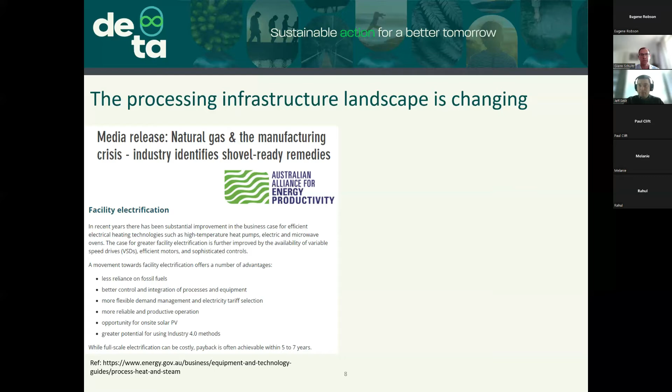As we discussed in the last webinar, there's still a lot of work that needs to be done around the commercialization of hydrogen, certainly when we get down into industry levels.

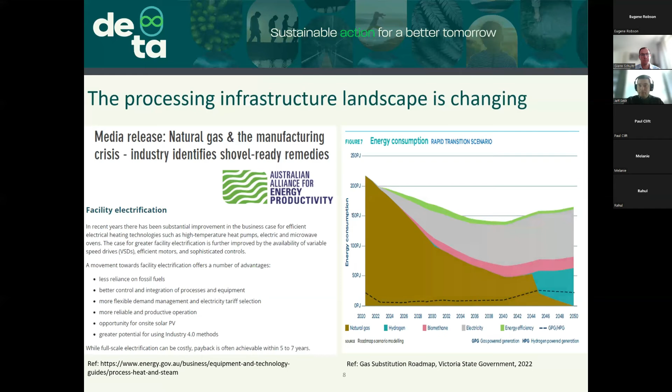Just to lead on to that, I think it's time to address the old elephant in the room, which is the carbon tax. So the question really becomes: how long is Australia going to remain exempt from a carbon tax or some sort of ETS program?

I'm not going to say this is obviously coming, or when it's coming. This really comes down to individual businesses looking at their risk appetite moving forward for a potential carbon tax and what that's going to mean for their facilities.

If we look across the ditch to New Zealand, they're currently paying $87.15 per tonne as a carbon tax, with the Climate Change Commission suggesting they should raise the trigger pricing, once achieved over and above the credit allocations within that $87 network, to about $171 a tonne.

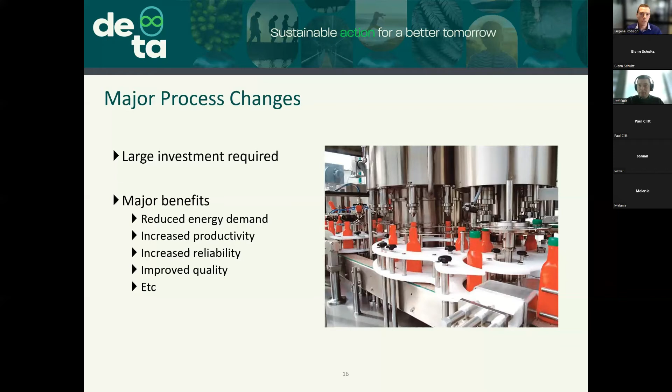So as an example, I've got a few on the next few slides here. This particular one is specific to the pulp and paper industry.

The industrial way to make paper is basically the same as if you're a child, just with very, very large equipment at very high speeds. There's a forming section where the wet pulp gets spread across the forming table.

It then goes through and gets dewatered through a press section to squeeze out the excess moisture before it goes through a drying stage to evaporate the water off the sheet.

These machines are around 100 metres long in some cases, so they're really large bits of kit. But there are often opportunities which operators and site engineers will be aware of, where there might be some mechanical or maintenance issues, or a vendor comes along and offers a new solution, which could be a new and improved dewatering section.

So in the pulp and paper process, if additional dewatering can occur before going into the dryer, then you're mechanically removing water with quite low energy input, which means you don't have to use as much steam to dry to the particular specification for that sheet.

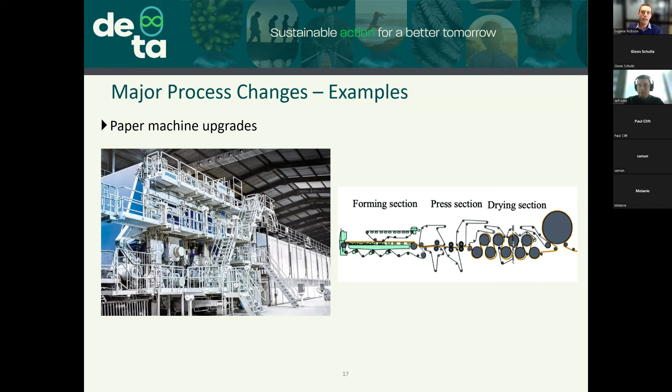And likewise with capacity upgrades and improving the hood and airflow, there's a limit to what you can do on the current equipment. But if it's starting to be a bit old or towards the end of life, there can be some really good opportunities to improve both productivity and also reduce energy at the same time.

So as opposed to just putting in a heat pump or a different type of boiler, it's a really good chance to question whether hot water should actually be used for that particular application. For example, over in the UK, there's a company developing UV knife sterilisers, which rather than water, basically just get zapped with UV to kill the bacteria. In about 10 seconds, the knife would be clean and able to continue being used. So this is an example of basically a no water option.

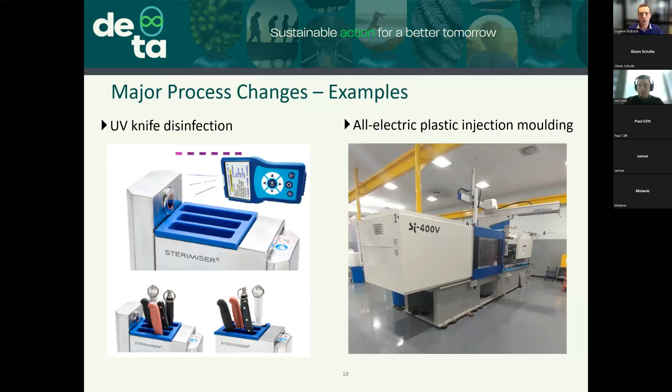But historically, the drive system was traditionally hydraulic, which compared to modern all-electric systems is less efficient. So this is another example where you can get some really good reductions in electricity use while improving performance, reliability, and productivity for those types of equipment when it comes up to either asset renewal or site expansion. And yeah, it's just that dual benefit there.

And the final example I had is around some major process changes we've come across for some of our clients. This one's quite specific to sites that require evaporation as part of the process. For example, evaporators are used in the milk powder industry to increase the concentration of milk prior to going through the dryer, because it's more efficient to do that step before using the steam air heated dryer.

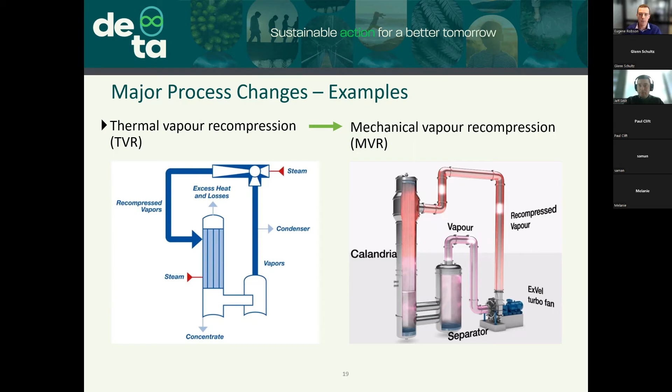So they're just some various examples where, before even looking at some of the boiler systems, there are opportunities for that higher capex expenditure while changing the process and having a good stepping stone on that decarb pathway that Glenn mentioned.

The next section I wanted to cover is electricity supply. We've talked about some of the larger process opportunities already. This section covers electricity, and the final section will be around some process heat switching.

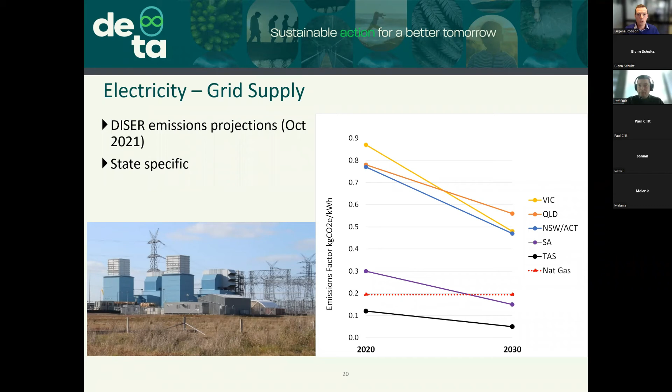The key reason for still having those reasonably high figures by 2030 is shown on the left-hand side, an example of a gas-fired power station in Victoria. There's still going to be additional investment going into renewables and solar, but baseload generation will still be required to meet demand, which means that by 2030, in order to hit green targets, other types of supply will likely need to come online, which is quite site specific.

When it comes to renewable supply, there are really only two routes to go down. The first is on-site generation, just looking at electricity, which in most cases would be solar PV systems. In some cases, if anaerobic digestion is available, a combined heat and power system could be an avenue to generate some of the electricity for the site, but it's unlikely to provide the whole site load.

The other option is directly investing in off-site green generation. The typical path for this would be a renewable power purchase agreement, or PPA, from a retailer or supplier where a particular project is specifically allocated, with a guarantee that the investment going into procuring that electricity directly goes towards that project, encouraging additional investment in solar, wind, and in some cases hydro.

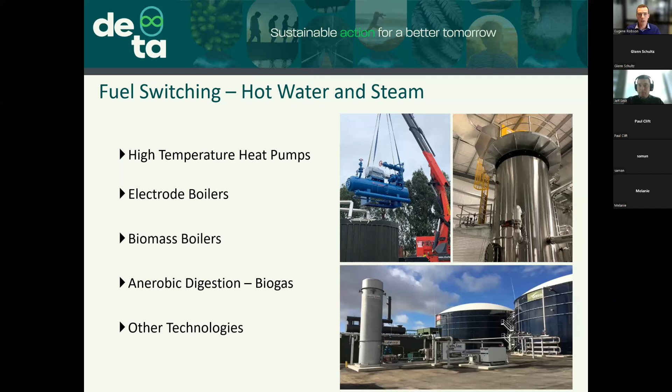In New Zealand, and we're starting to see a few more examples of these technologies over in Australia, I'll touch on heat pumps mainly for hot water production, both electrode and biomass boiler options, touch on biogas as well, and then give a taster for some other technologies coming down the pipeline that have really good potential but are still either site specific or in that development stage.

Hopefully everyone on the call knows that high temperature heat pumps are wonderful things for hot water. So if you don't, then you can have it as the key takeaway today.

Generally they're really good for producing hot water between 40 to 80 degrees, and in particular for food and beverage type applications where there's cleaning involved, there's washing, or it's used directly in the process. This can be a really good way to decarbonize a gas-fired hot water heating system.

In order to make the system efficient and to help reduce the capital cost, ideally the heat pump would be supplementary to an existing refrigeration plant, which could either be a chiller or a freezer plant. The reason for that is the refrigeration systems are giving off a lot of heat to atmosphere through the cooling towers. So rather than rejecting that heat to atmosphere, a heat pump is effectively adding an additional stage on top of the current high stage.

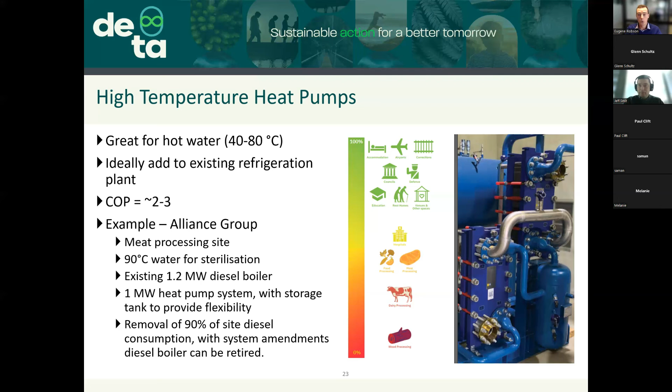Next up for alternative steam options is electrode boilers. These have a variety of benefits, but also some drawbacks to be aware of. But if you're able to source green power to go into them, then they can be a fantastic way to decarbonise a site using existing technology that's available.

The electrode boilers are high pressure, so 10 bar and up, and they don't have any issues with it. From an efficiency perspective, because there's no direct combustion of gases and having to draw in air like an existing natural gas boiler or a coal boiler, you don't have any efficiency losses from the heating process. It's just the losses from hot pipe work etc. around the boiler itself. So the combustion efficiency for these boilers is actually 100%, which is pretty jolly good, as opposed to that 85-ish% for a gas-fired boiler system.

One of the other benefits is that they are quite compact. They're basically giant kettles, so large, tall cylinders. And because they're in a vertical orientation, the actual footprint required for them is not particularly high. This is a benefit for existing sites which may have some space constraints, where if there's a current boiler house, it's possible these could be included into the current one or added onto the side. Whereas biomass boilers are much larger, so they take up a lot more space compared to an electrode boiler.

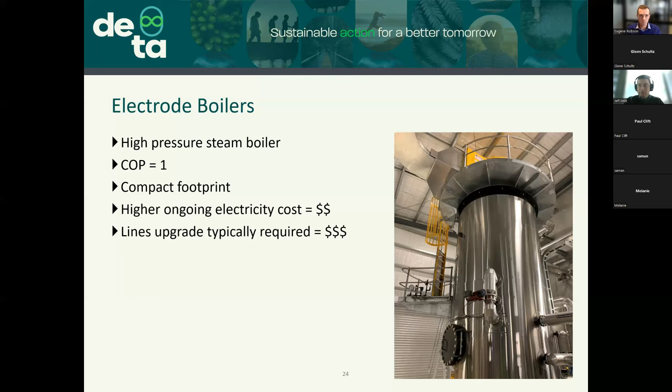So here's an example from New Zealand: the Mataura Valley Milk Company, based down in Southland, which already had a coal boiler on site at 40 bar. In the image on the right you can see the large coal stack. Through their decarbonisation strategy they've decided to install a 15 megawatt electrode boiler, which is a pretty impressive project.

Coal is very cheap for them, so the electrode boiler, using grid electricity, will actually come at a premium compared to coal. But because it aligns with their sustainability targets and there are product quality benefits as well, that was the pathway they decided to go down, which is really bold.

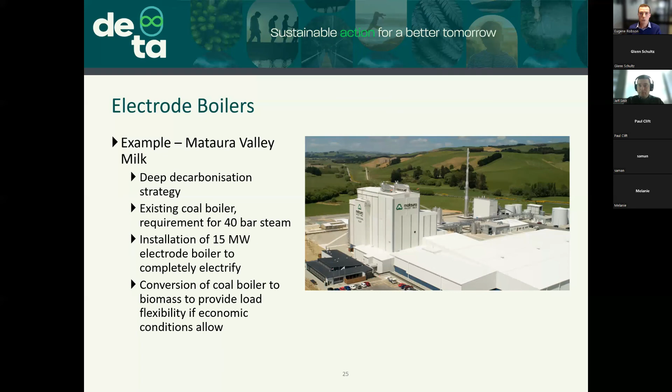They're keeping the existing coal boiler asset available, supplementing it with biomass. That allows them, when there's not much hydro around, for the retailer to use them to shed load - they'll switch off the electrode boiler and bring the existing one back on site for a few week windows, then shut it back down. So there's a good financial benefit to keeping the current boiler asset available.

Rolling into biomass boilers - this is another renewable option for steam generation. There's heaps of examples of these over in Europe, and some in New Zealand and Australia as well. One of the things with biomass is that it's quite location specific.

Depending on what resources are available either near to the site or co-located, it could either be a really good option or quite a poor one if there are large transport distances involved. Typically, if it's a waste product - like offcuts, sander dust, or hog fuel from forestry - that's a cheaper fuel source as opposed to, say, pulp chips, which are a lot more expensive.

The other slight drawback with biomass is that, compared to coal, the energy density is much lower. If you're looking at pellets, which are a bit drier, you're up around 17 megajoules per kg, but for coal, on average, it's about 24. There's a bit of a penalty there with the energy content, which means the number of truck movements to get that material to site is a bit higher, and that does need to be factored in as part of the design.

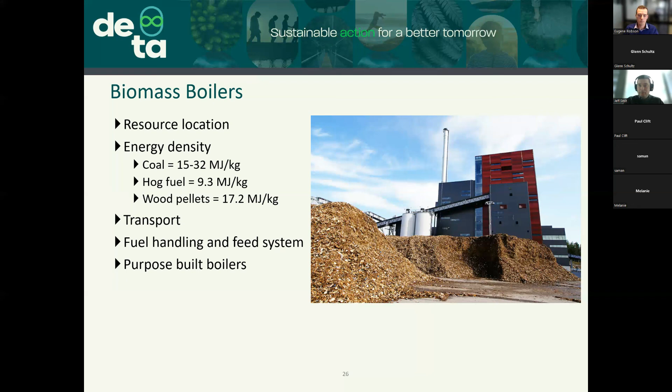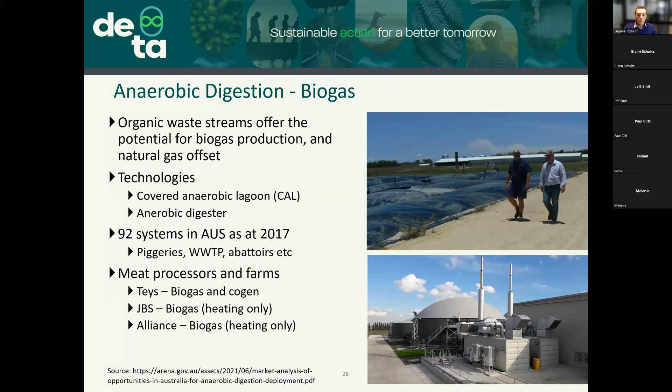On the next slide, there are also a wide variety of alternative options and technologies which have very good potential depending on how the technology develops and the economics too. So just on the slide here are a few examples, and the plan is in webinar 3 we'll go through these in more detail with examples and case studies. But as a bit of a teaser, we'll be looking forward to talking through some of these options with you in the next one.

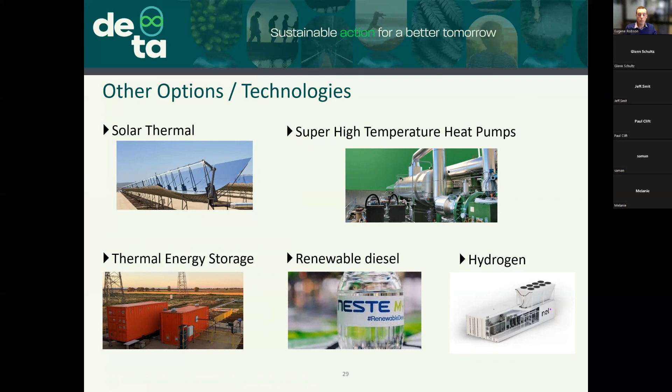But should be investigated to determine how the economics look and what's best for your site. So look, that's all I had. I appreciate we've only got a few minutes to go, so I'll stop there and hand back to you, Jeff, for any Q&A. Thank you.

Thanks, Eugene, and thanks, Glenn, for that overview. As you can see, there's lots of content to cover, so the 45 minutes blew out a little bit, but we're going to have 2 questions, if that's okay. I'm going to ask one, which is really, we talked about lots of technology, and I guess the question for you is, what makes sense now? Economically, you talked about electrode boilers being challenging. Does any of this stuff reduce cost when you're talking about fuel switching?

Yeah, it's a good question. So going back to the whole pathway, the stuff that makes good economic sense currently are all of the smaller low-hanging fruit around efficiency and heat recovery, which give really good paybacks. Some of these options, depending on the price of electricity, and with more renewable electricity coming online, the prices would hopefully be a bit more separated from the gas market, so we should see a decline there. So longer term, it will be good, but at the moment there are some challenges around doing an immediate switch to, say, a full electrode boiler, not only from the operating cost, but also the capital cost for that infrastructure can be quite high as well. So there's no magic bullet for immediate changes, but it's more thinking around what are some options to consider, and at what stage would some of those decisions start to be made along that sort of 10-year journey.